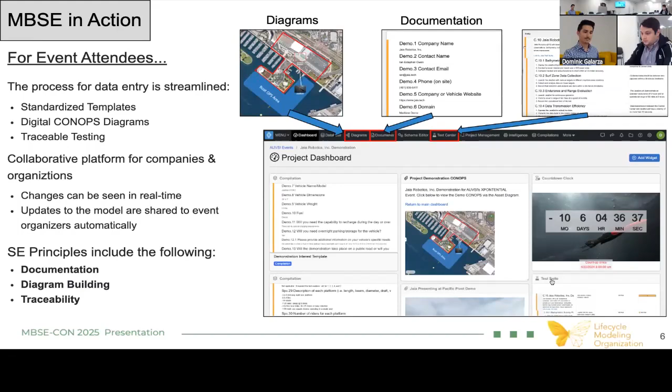The great thing about this too is that if you click on those entities, you can actually see its relevant information, its attributes, and what it's related to in the project as a whole. So no piece of information is just stuck there, and everything is able to be transformed seamlessly.

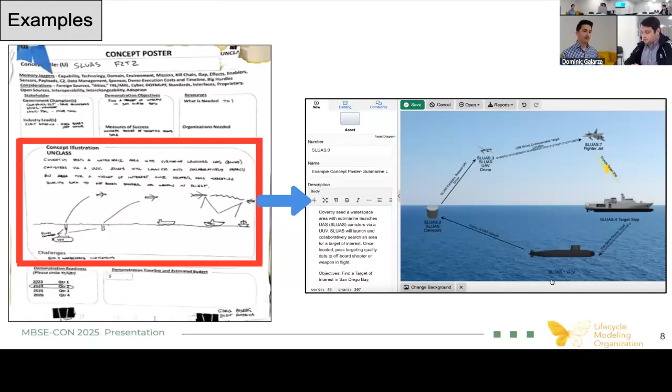And then lastly, we have the last little bit of project information: the cost, the timeline, the demonstration timeline, the budget, everything like that. Again, that is all able to be transformed and related to this system as a whole.

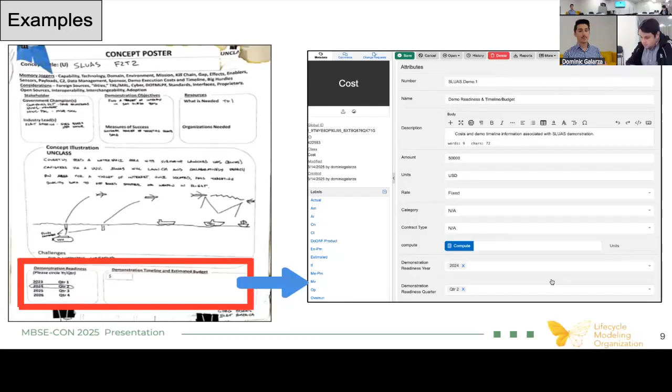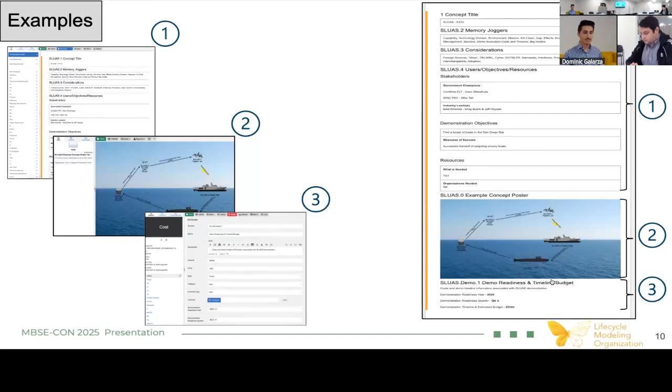And so now I'm just going to run through a quick little use case of what actually happened during these events last year.

So before the event even started, SPEC Innovations and AUVSI staff worked together to create a standardized ontology, and project templates were made for each organization. Every company that registered for the event was given their own blank project to access and start inputting their own information.

AUVSI staff actually wanted the coordinates for each event too. This was very useful for them because before the event started, they were able to allocate spaces for each of these demonstrations happening.

Vendors are able to access their needed information in their project. During the event, staff were actually running around with iPads and tablets, being able to quickly access their information without having to sift through many papers or forget papers somewhere else. They were able to have their information just on that tablet and just click it and access it. So it was very, very easy for them.

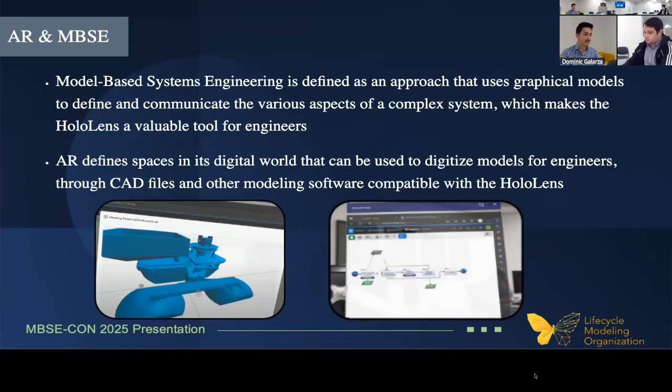The HoloLens 2 can seamlessly integrate with Innoslate, capitalizing on its cloud accessibility. This allows users to access Innoslate from virtually anywhere with an internet connection through the HoloLens 2. The AR headset's multitasking capabilities enable users to run multiple instances of Innoslate simultaneously, which enhances productivity.

Also, collaboration and 3D visualization can be enhanced through this process. As a result, users can access Innoslate projects and their data directly through the headset without the need for a physical hardware connection.

As seen in this image, this is the vision we have for the HoloLens headsets, having multiple instances of Innoslate accessed at the same time. Now let me run you through a quick live demonstration of me using the tool, which I have in a video here.

Can you see this video? Yes, okay perfect. So again, this is just me accessing Innoslate and using the tool within the headset. You can't see it in the video, but I'm actually touching and grabbing the space in front of me, and to the headset, it's just me touching the screen with my finger.

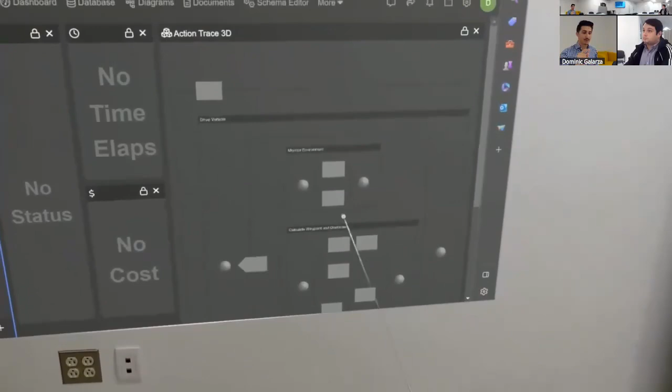Then you can see me accessing a 3D diagram within the tool and using simulation capabilities. I'm just pinching the diagram and moving it around with my fingertips. And again there, I'm running a simulation through a diagram I created, and seeing how it's being moved in real time.

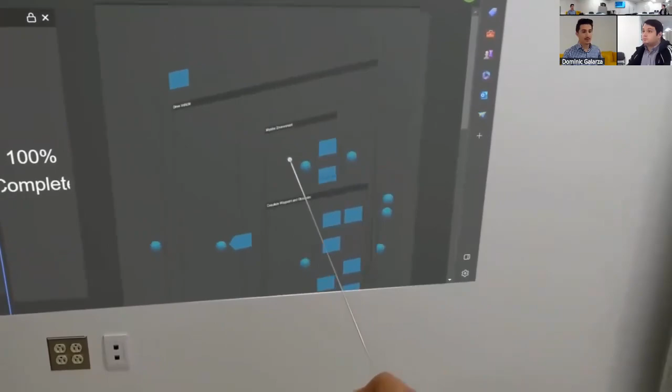For this part, I'm accessing the database and pulling up a PDF file that I saved into the project. By going into it, I'm going to the entity and then downloading the file, which I can see here.

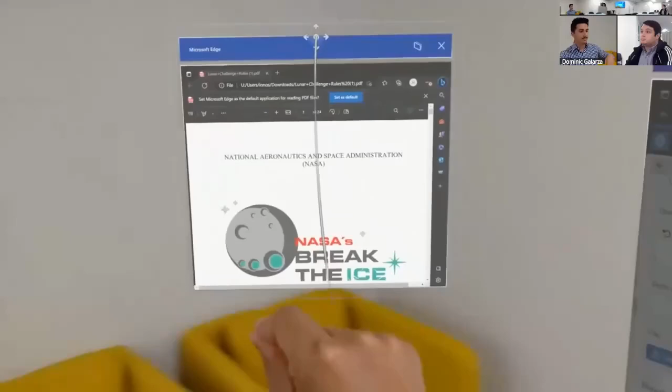Click download there. You can see the file just downloaded. So then when I open it up, I can actually open it with my fingertips and see it right over there, and access that file and open it up more.

I'm just standing here, pushing through this information. That's just another tab I opened. You can see here I'm running different instances and seeing different data.

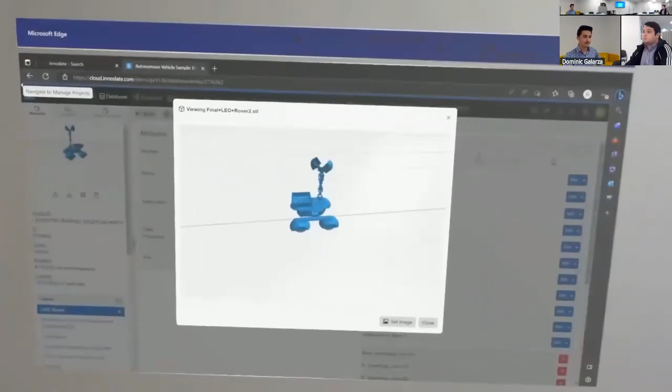In this example, I'm pulling up a CAD file. If I open up the entity here and view the CAD model, it takes a little time to load, but then I can see the model right there.

You can see how I'm using my fingers to move through the diagram or model and see it in depth. There I'm using two hands to move through it. Let me get back to my slide here.

Upon that demonstration, you can see how no device is perfect, and that includes the HoloLens headset. So here are a few limitations I noticed while using the HoloLens headset in depth. First was the hardware itself.

It is really impressively compact, but that can lead it to being slow at times. This was especially true when I was opening up different tabs and using different applications at the same time.

The next limitation I faced was the text-to-speech capability. While it was pretty impressive what they had, Microsoft strangely rolled back their text-to-speech capabilities and even some of their AI capabilities, one of the main ones being the Cortana feature. You could say 'Hey Cortana' and use their AI capabilities, but they scaled that back through some recent updates for some reason. I'm not really sure why.

The next performance gap came from the field of view. It was relatively small compared to other headsets on the market right now, which did make it hard to see sometimes. The last performance gap we noticed was the hand tracking.

One of the big major selling points of the HoloLens headset was that it required no other hardware, just the headset itself, relying on its hand tracking and sensors to notice its hand tracking capabilities. While it is spot on for the most part, other times it can be a bit spotty and a bit dodgy.

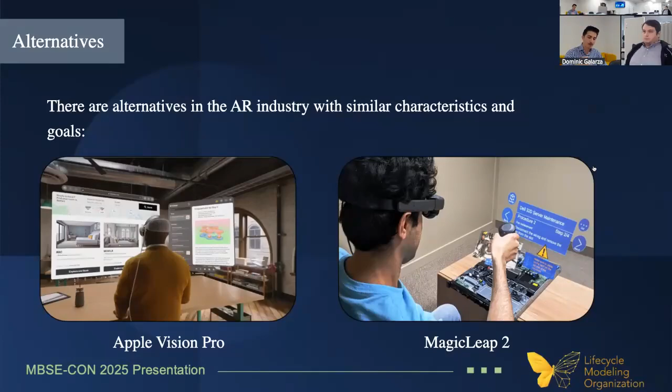The next one is a technology that's been around for a while, the Magic Leap 2. It's another headset released by the company Magic Leap, designed to blend digital content with the real world, similar to the Microsoft HoloLens, but more geared towards industry capabilities. It's being used for maintenance tasks by companies such as Boeing and AT&T. You can see an example of an SOP being digitalized, with a person working on it using another hardware device.

I had some news recently that Microsoft canceled their plans for a HoloLens 3. They were developing it as the HoloLens 2 was being updated and released. There were talks about the HoloLens 3, but Microsoft made the official announcement to cancel it. However, that does not mean they are canceling the HoloLens 2. They are still implementing updates to its software capabilities. Just recently, it was announced that the government contract for the military-use HoloLens was canceled and handed to another AR company.

So the HoloLens, I call it the 2.5, is just a military-use HoloLens. It's the exact same one as the HoloLens 2, but more geared towards soldiers and their helmets. That one is still somewhat being updated, as actual hardware has been released for soldiers, but it has had some mixed feedback from them. They're still implementing more updates for the HoloLens 2 and its software, but as of right now, the future for the HoloLens 3 is not looking very good.